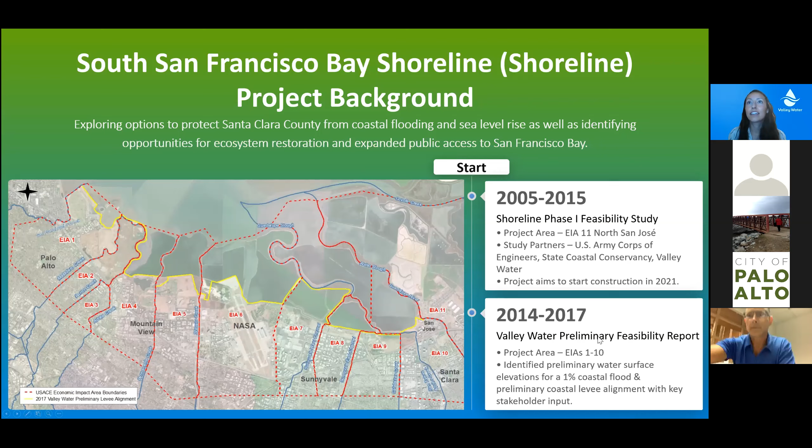So the next study I want to talk about is the Strategy to Advance Flood protection, Ecosystems, and Recreation along San Francisco Bay, also known as the SAFER Bay study. The public release of the draft SAFER Bay feasibility report for the Palo Alto area happened last year in June, and it was prepared by a consultant on behalf of the San Francisquito Creek Joint Powers Authority. The Joint Powers Authority is a regional government agency founded in 1999 by the cities of East Palo Alto, Menlo Park, and Palo Alto, as well as the San Mateo County Flood Control District and Valley Water.

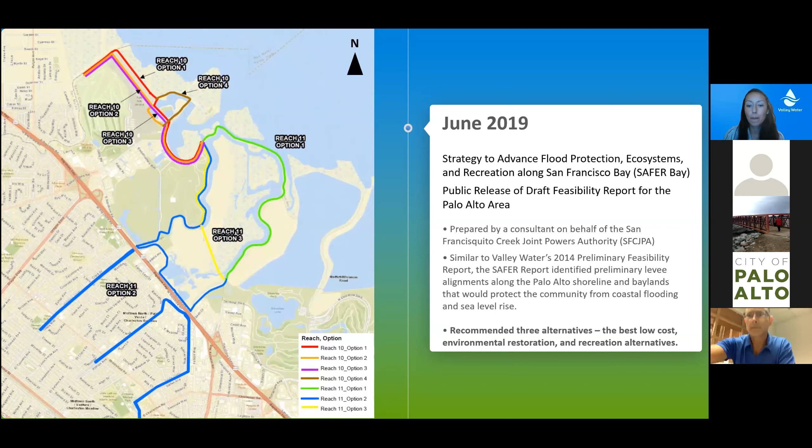And similar to Valley Water's preliminary feasibility study that I just mentioned, the purpose of the SAFER report was simply to identify viable levee alignments that would protect the community from sea level rise and coastal flooding. The Palo Alto SAFER Bay project is divided into 2 reaches designated as Reach 10 and Reach 11 as shown in the map here. And within each reach, there are multiple potential options to achieve the flood protection objective. The report recommends 3 levee alignment alternatives. One is the lowest cost, another maximizes environmental restoration, and the last maximizes opportunities for recreation. Which leads us to today.

The Shoreline Phase 2 feasibility study will build on all of the information gathered in these previous studies and will evaluate all of the SAFER alignments in more detail. The study area encompasses economic impact areas 1 through 4 along the shoreline from San Francisquito Creek and Palo Alto down to Mountain View Slough. And you can see on the map, the project area is outlined in yellow. I'll talk more about the study in further detail in the coming slides.

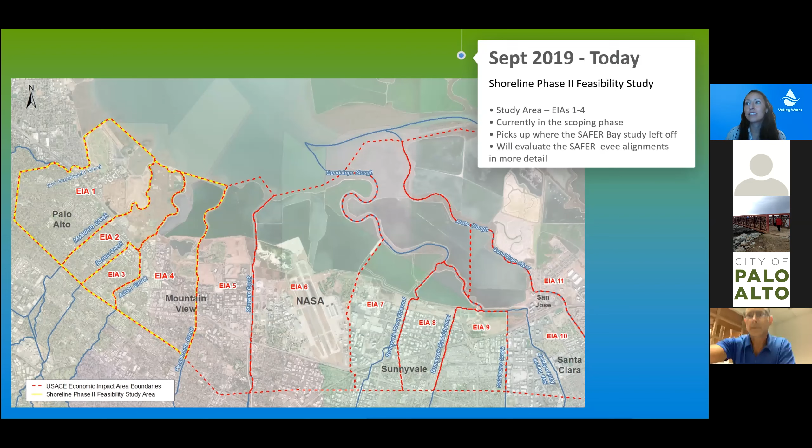So again, this is just to help orient ourselves. So the Phase 2 feasibility study project area runs along the Palo Alto shoreline north of Highway 101. There are a number of structures and key infrastructure located in this area, including the Palo Alto Airport and the Palo Alto Regional Water Quality Control Plant.

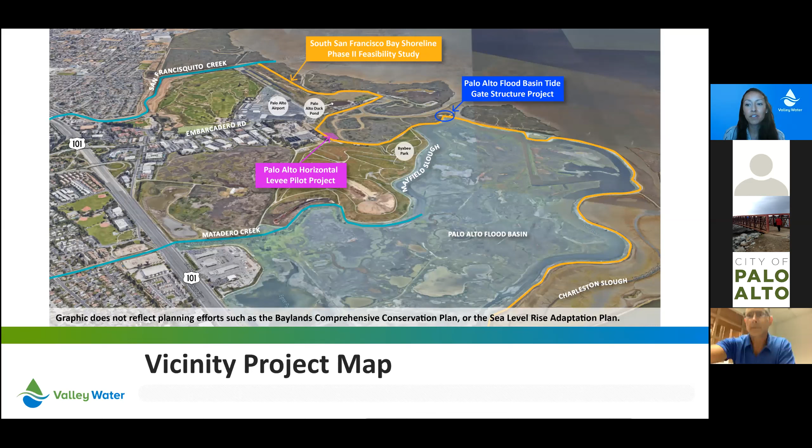Okay, so the U.S. Army Corps of Engineers is the federal lead agency of the Shoreline Phase 2 feasibility study. In general, U.S. Army Corps of Engineers feasibility studies are cost shared with the sponsor. So the study non-federal sponsors are Valley Water and the California State Coastal Conservancy. Study sponsors pay 50% of the cost of the study, while the U.S. Army Corps of Engineers pays for the other 50%.

Lastly, the City of Palo Alto is a vital local partner for the study. The city shares its knowledge and experience of the project area, local conditions, environment and habitat, and design and maintenance issues related to the project alternatives under consideration.

So the Shoreline Phase 2 feasibility study is a dual purpose project. The main purposes are to provide coastal storm risk management as well as opportunities for ecosystem restoration. So the specific coastal storm risk management study objectives are to reduce risk to human life, health, and safety caused by coastal flooding and sea level rise, reduce economic damage from coastal flooding to the community, and reduce flood risks in a manner that maintains or improves the ecological function of the baylands by implementing nature-based flood protection solutions.

The project-specific ecosystem restoration objectives are to restore ecological function and habitat for native plant and animal species, reduce risk to baylands from coastal flooding and sea level rise, and to the extent practicable, implement measures that increase public access to the shoreline. All of the proposed project alternatives for the Shoreline Phase 2 feasibility study should stay within the study constraints listed here. Specifically, the project should not affect critical infrastructure or increase flood risk. The project should avoid impacts to other restoration projects in the bay and avoid reducing recreational access opportunities.

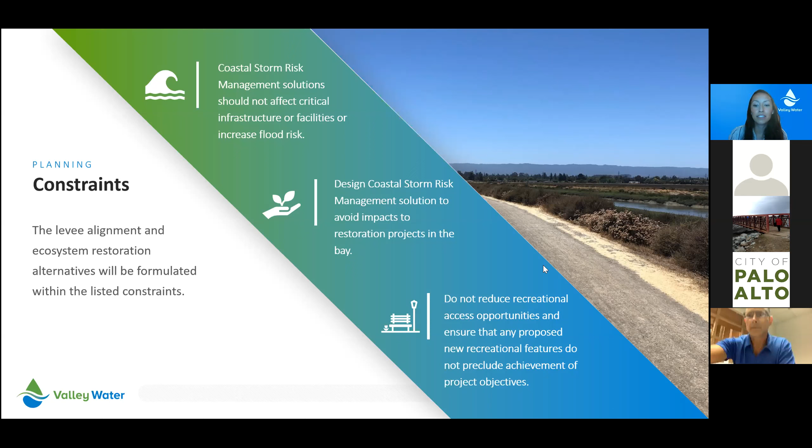So the next upcoming milestone is the tentatively selected plan milestone, scheduled for spring of 2021. At this milestone, the study partners will agree on one recommended project alternative to move forward with more detailed engineering and cost design. Between now and the tentatively selected plan milestone, the study partners will develop project alternatives, ecosystem restoration options, as well as a bunch of different levee alignments. Then they'll investigate the engineering feasibility, economic justification, and environmental acceptability of these levee alignments and ecosystem restoration alternatives.

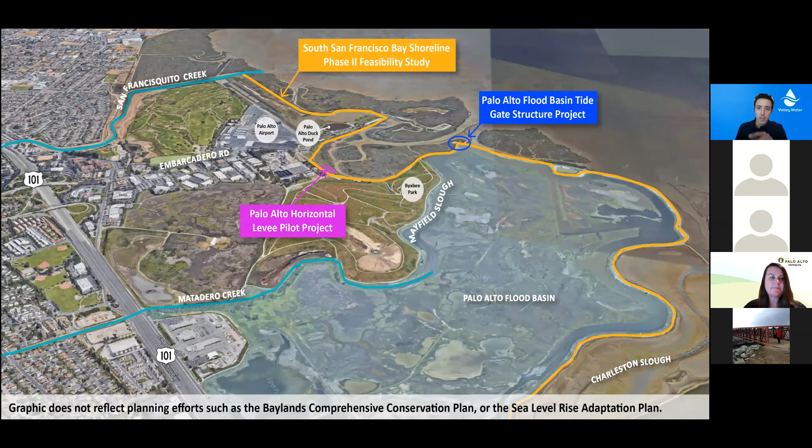As you can see on the screen right now, that is the existing tide gate structure. It's out there on the Adobe Creek Loop Trail. I'm not clicking through here. Okay, just to put it in perspective, along in the orange there, you can see one of the proposed alternative alignments for the Shoreline Phase 2 study that Roxanne just talked about. As well as in blue, there's a little blue circle there that shows where the existing tide gate structure is.

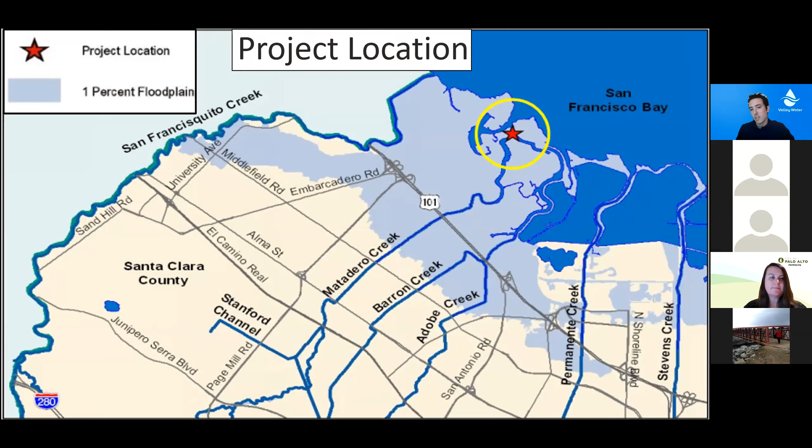Moving on, here's a little overview map. You can see the red star up in the upper part of the map, that's where the existing tide gate structure is. And that light blue that you see inland, that's the FEMA flood zone, because of coastal flooding risks, because the existing levees are not FEMA certified. They were built back in the 50s, and they're not recognized by FEMA, but they do provide flood protection.

And also just to note, the levees along the top are a lot higher than the levees along the inside. And that's because those are also the outer portions of the levee of the Palo Alto flood basin, and the tide gate structure are preventing against coastal flooding from a high tide.

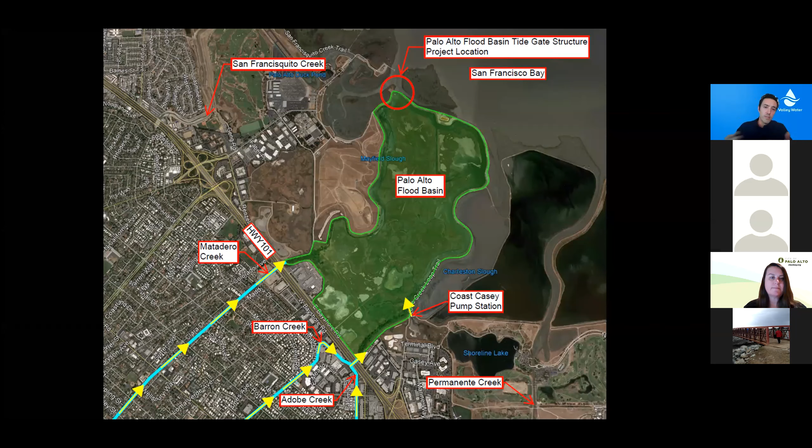And so that's what the levees and the tide gate structure is doing. It's keeping that high water level out and allowing for a low water surface elevation so that there's that capacity for the big storm events.

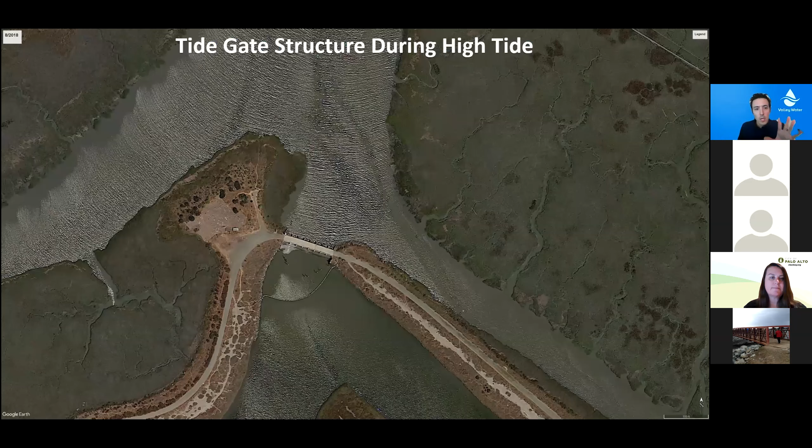Here's an aerial shot just showing you the existing tide gate structure during a high tide. And that same shot during a low tide, and the water level in the basin is the same. This is all taken during the summer, but you can see there's quite a big difference in the sea level in the high tide and low tide.

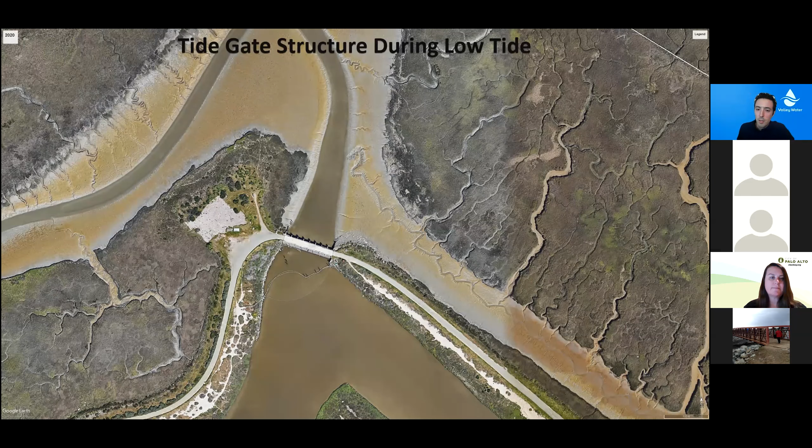Just a quick background, the existing structure was constructed back in 1957 by the City of Palo Alto, the Santa Clara County Flood Control and Water Conservation District, which is now Valley Water, and Santa Clara County. And as we talked about, the Palo Alto Flood Basin controls the starting surface water level elevations for Adobe, Barron, and Matadero Creeks. And the tide gate structure, combined with the levees, provide also coastal flood protection.

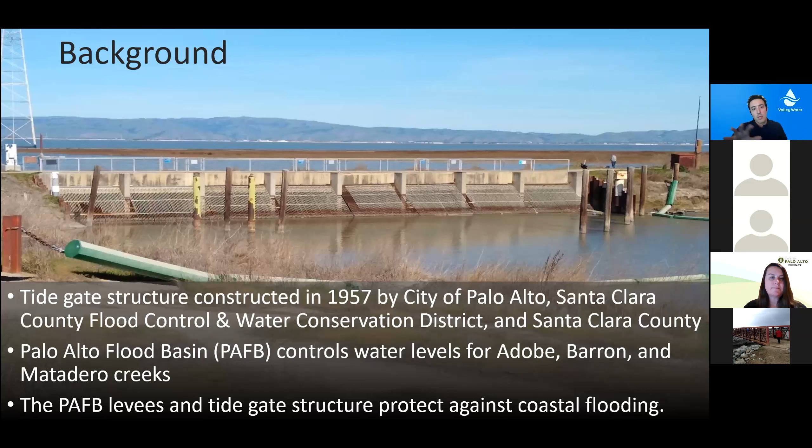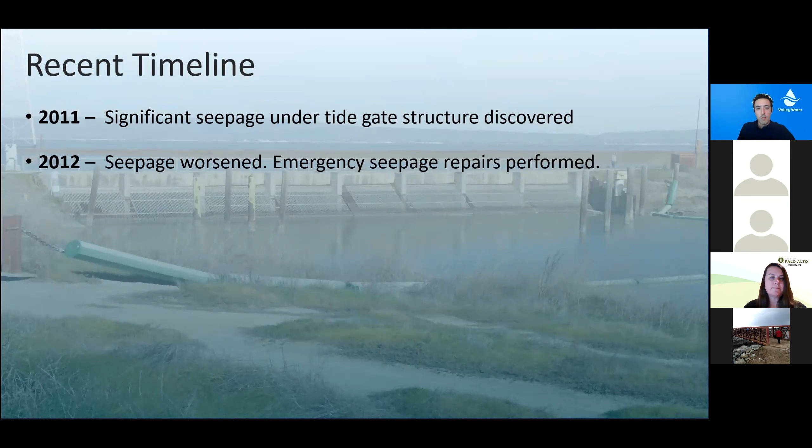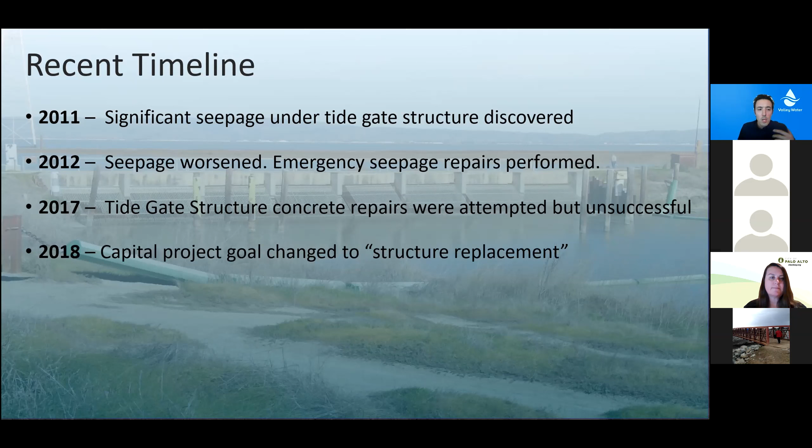So a more recent timeline, back in 2011, significant seepage was discovered underneath the structure. And in 2012, that seepage worsened, and Valley Water performed emergency repairs to stop that seepage. And then in 2017, Valley Water attempted to perform concrete repairs to lengthen the service life of the existing structure, but the contractor wasn't able to actually complete that construction because of additional damage found, and they were unable to dewater the work site. And so upon further review of the structure, it was actually determined that it's going to be better to replace the structure rather than repair it.

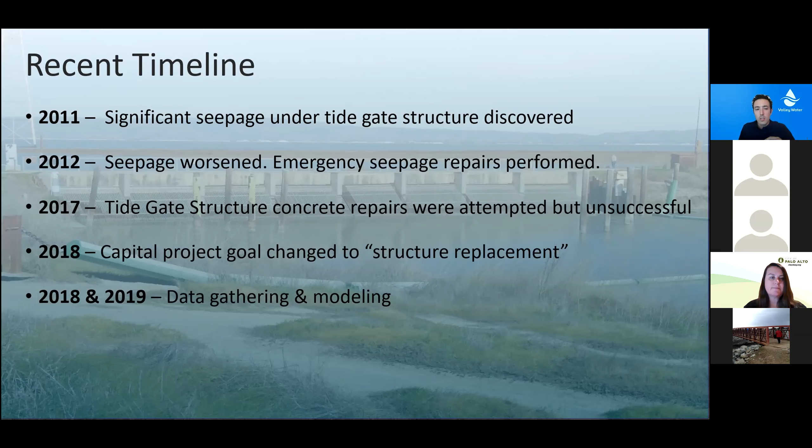So in 2018, the goal changed to a replacement structure. And we've been doing a lot of data gathering, modeling to support this replacement structure. And currently we're ongoing with preliminary design.

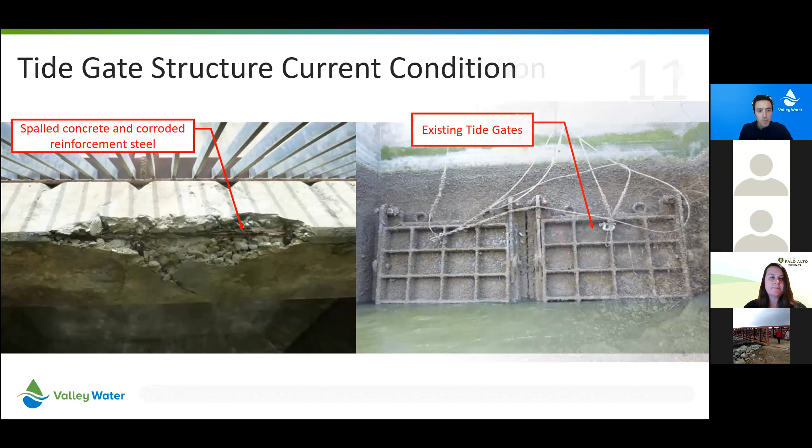Here's some pictures just kind of showing what the existing structure looks like if you were to get underneath and look at it. There's a lot of spalled concrete and exposed rebar and weathered tide gates. And even on the top, you can see spalled concrete and exposed rebar. You know, it's in a marine environment, and this is kind of typical of the age of this structure, and it's time to be replaced.

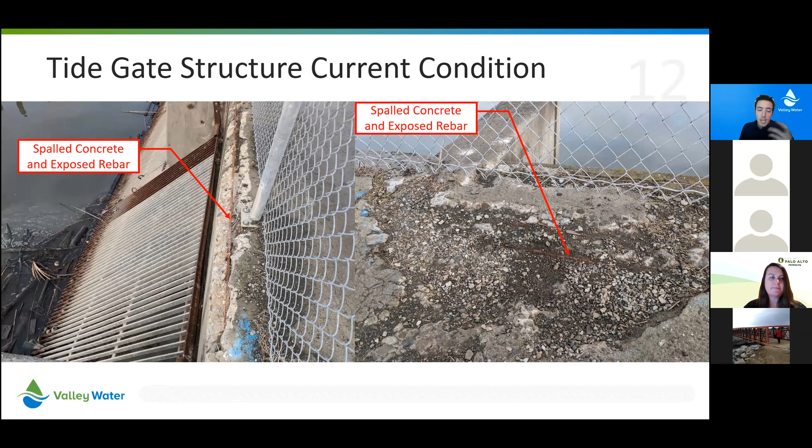So the existing structure is a 63-year-old structure. It's got some structural and hydraulic deficiencies, and maintenance is becoming more and more problematic and costly. It has some seismic vulnerabilities. You know, it's founded on timber piles. There's some potentially liquefiable soils. There's leaky tide gates. As you saw, there's spalled concrete and corroded steel reinforcement.

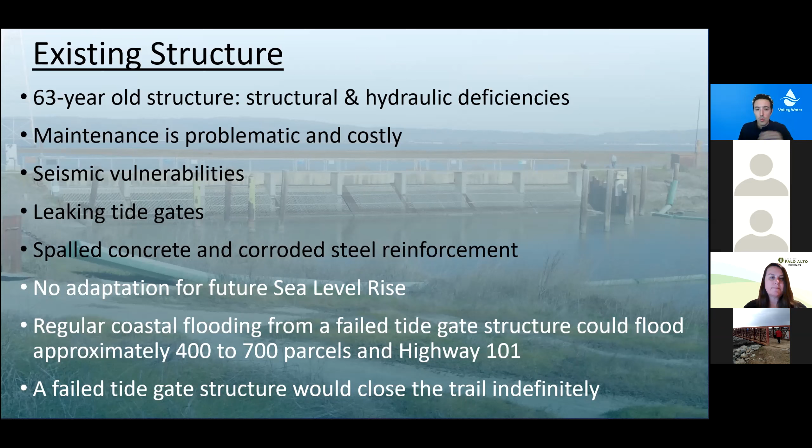There's no adaptation for future sea level rise, and regular coastal flooding from high tide could potentially flood 400 to 700 parcels and Highway 101, and we don't want to let that happen, and that's why we're replacing the structure. And also want to note that a failed tide gate structure would close the trail down indefinitely.

So with the proposed replacement tide gate structure, we'd see continued coastal and creek flood protection, continued protection of the existing basin habitat. Construction's anticipated to take about 4 years, and that construction's only occurring over a 5-month window each year between September 1st and January 31st, and that's to protect the California Ridgway's rail breeding season. It would accommodate roughly 2 feet of future sea level rise, and a temporary trail closure is estimated about 35 months.

And also want to note that the new tide gate structure is going to be about 5 feet higher than the existing structure. And the new tide gates and sluice gate will be more efficient than the existing gates. It'll have improved operations and maintenance, and fewer maintenance required. And the current preliminary cost estimate is around $33 million or more.

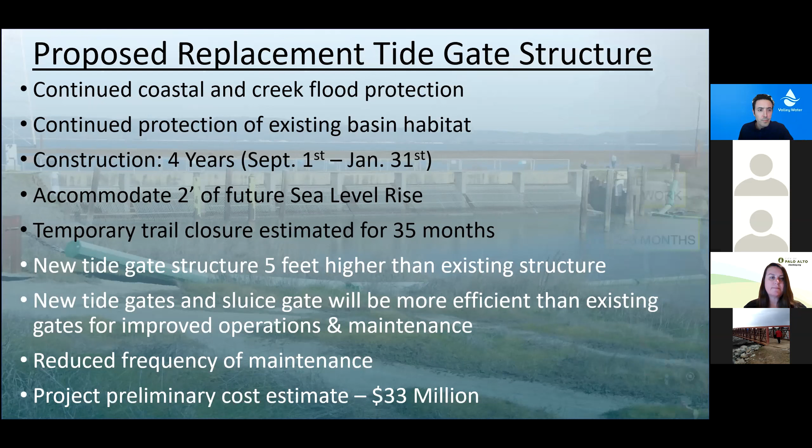These next slides, I'm going to go through a little quick. It just shows the construction staging proposed. And the big takeaway from this is just showing the difficulties in constructing this project. You know, we're out here, we've got a sensitive habitat. You've got the Palo Alto flood basin on one side, you've got the San Francisco Bay on the other. We're out here in the water. Everything has to be dewatered to construct. And most importantly, we're constructing only in a 5-month window where there's also a rainy season involved in there.

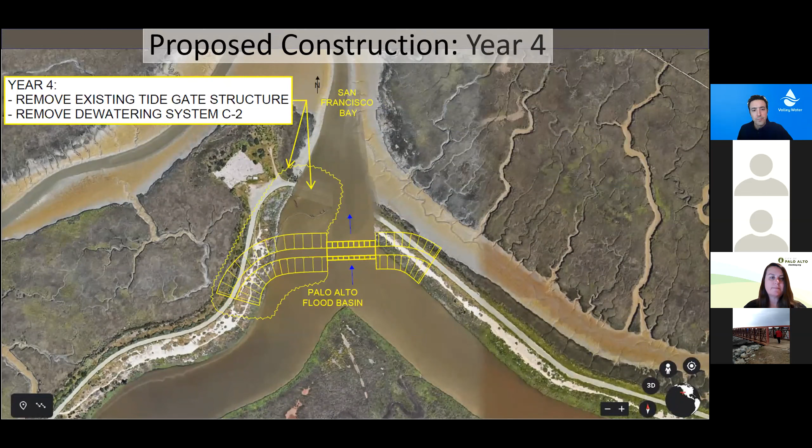And also the big takeaway here is that we have to construct the new structure first. And then once a new structure is put into service, the existing structure is removed. And so there's going to be continued flood protection throughout construction. So here in yellow, you can kind of see this is where the new structure is planned.

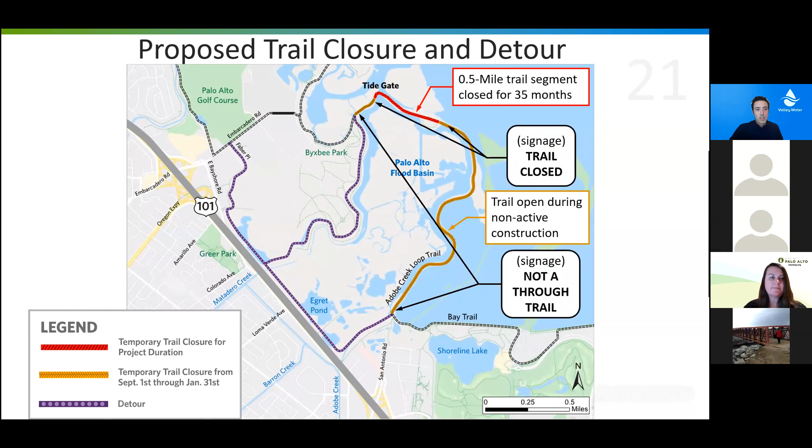So environmental resources, as you just saw, we're in a very unique setting along the bay. We have sensitive fish and wildlife species. There's 4 pictured on the screen: the salt marsh harvest mouse, longfin smelt, burrowing owl, California Ridgway's rail, and there's many more. The salt marsh habitat, bay habitat, Palo Alto flood basin habitat, the Adobe Creek Loop Trail, which is part of the San Francisco Bay Trail. So we got recreation, Byxbee Park, Palo Alto Baylands access.

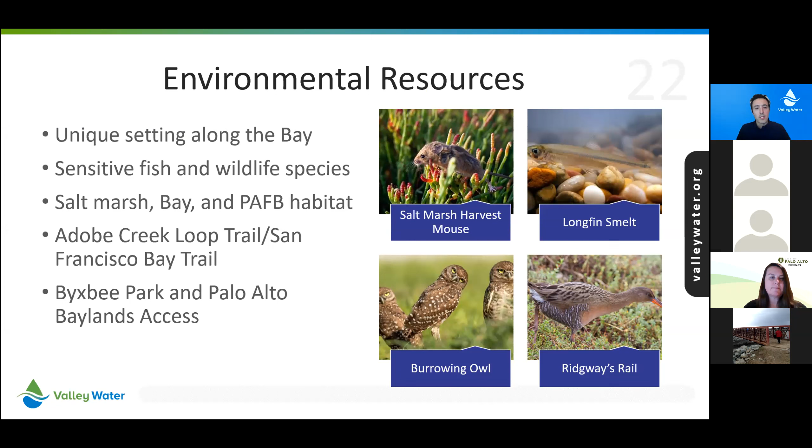Many considerations going into the development of this project and part of the permitting and our partnerships with all of our stakeholders. First of all, we have every permit under the sun that we're dealing with. But our CEQA is planned to be a mitigated negative declaration, also known as a CEQA MND. And it's actually probably going to be posted this coming Monday. And so I'll get to where you can sign up to make sure you're notified of where to view that and how to view that.

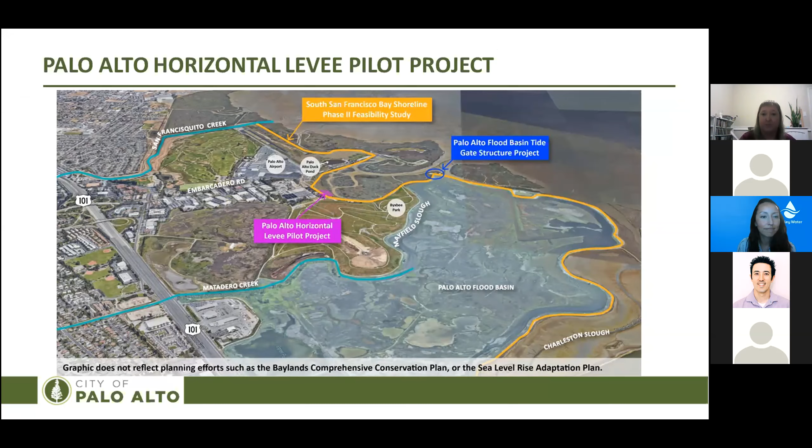So some of the project drivers have already been covered by Valley Water staff in their earlier presentation, so I'll keep this pretty high level. But the key project drivers really include the current state of the flood control levees surrounding the city of Palo Alto. Right now, they are not engineered to meet FEMA accreditation standards, and we do experience overtopping of those levees, especially during times that king tide events occur at the same time as storm events.

That's led us to participate in a few flood control levee improvement projects, those namely being Safer Bay and the South San Francisco Bay Shoreline project that we heard previously in the webinar. Those projects enable the city of Palo Alto to now think a little bit outside of the box and see if there's any ways that we can include green infrastructure into those larger flood control levee improvement projects. And that's where this project fits in.

Another project driver includes the acknowledgement from many resource agencies statewide that transition zones between terrestrial and tidal habitats are severely constrained and developed, and constrained specifically by steep artificial faces of traditional levees. And this is Bay-wide, so it's not a Palo Alto specific concern, it's definitely Bay-wide and also statewide. So the acknowledgement by resource agencies that the transition zones between terrestrial and tidal habitats are constrained and in need of additional restoration has made them a priority for many of those resource agencies.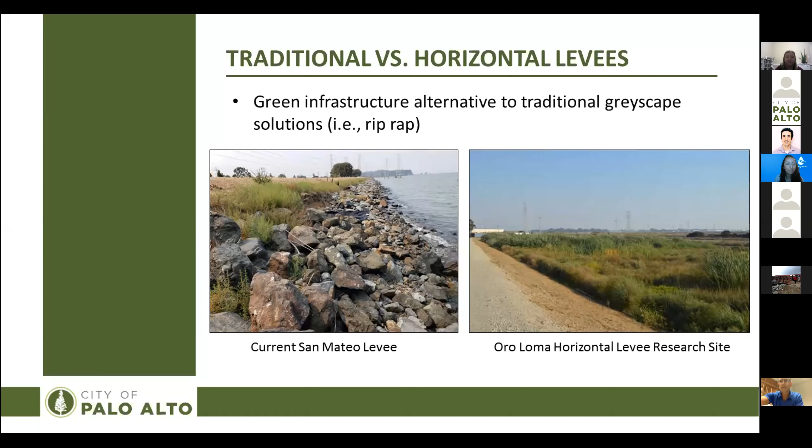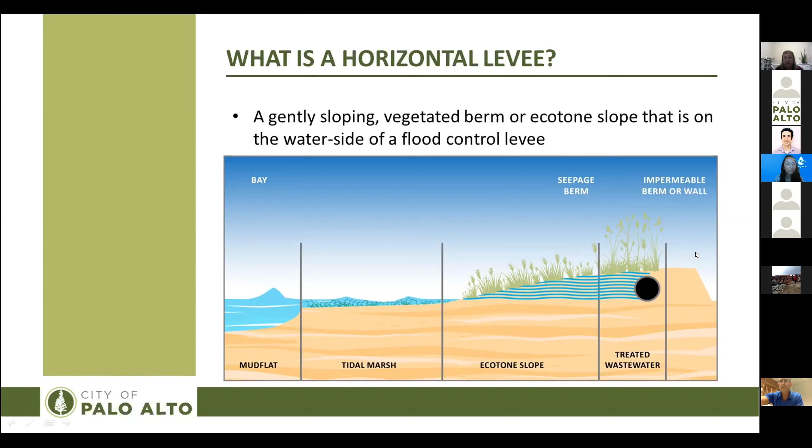So what is a horizontal levee? A horizontal levee is a gently sloping vegetated berm or ecotone slope that is on the water side of a flood control levee. So as you can see in this figure here, the flood control levee would be all the way on the right-hand side of the figure. And then the horizontal levee would be between that and the tidal marsh and mudflat and then the Bay. So a horizontal levee is essentially a brackish transition between an upland terrestrial habitat and a tidal mudflat bay habitat.

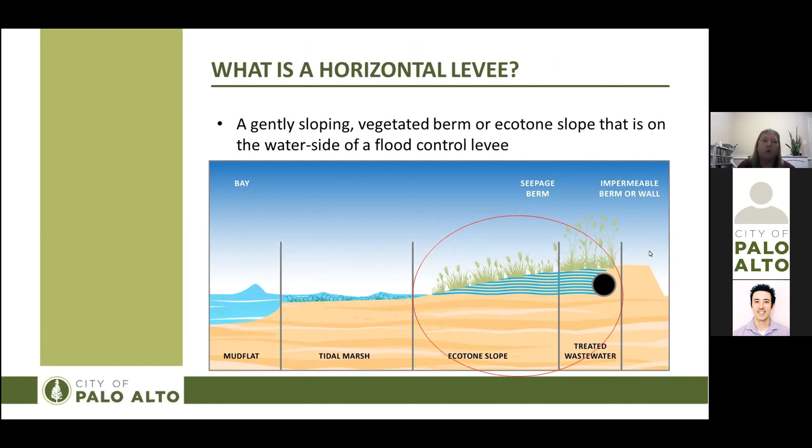So horizontal levees include numerous benefits above and beyond just the wave attenuation that riprap provides. That includes habitat enhancement, sea level rise adaptation, and wastewater polishing treatment. So for habitat enhancement, horizontal levees can provide that transitional habitat between terrestrial and tidal marsh that I mentioned previously in the webinar. That's a restoration priority for numerous resource agencies.

That habitat also provides high tide refugia for endangered species such as the salt marsh harvest mouse. And it also helps to recreate that historic freshwater seep that is missing in our system now. Those historic freshwater seeps have mostly been channelized into flood control channels or creeks to protect us further from flood issues.

For sea level rise adaptation, horizontal levees provide that wave attenuation similar to riprap. In addition to that, horizontal levee systems will accrete and accumulate sediment over time such that the ground level elevations will increase over time. And because of that, it can enable marshes to migrate upland in the case of rising seas. If a horizontal levee system is not installed, we run the risk of tidal marshes being overtaken by the seas and becoming open water as the seas begin to rise.

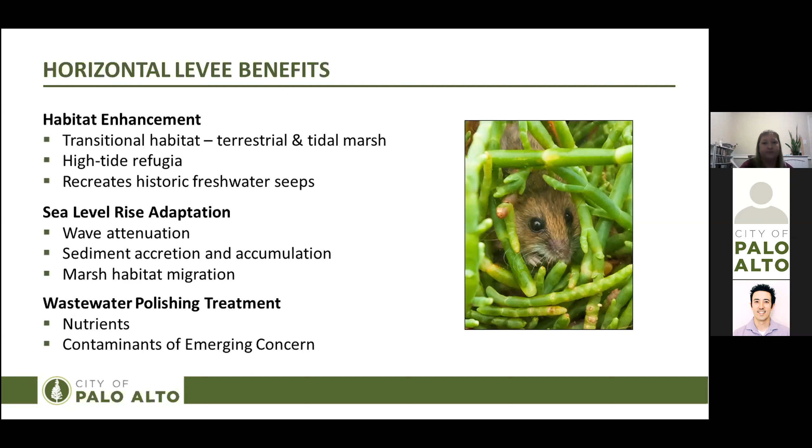So the horizontal levee would provide an additional level of treatment. It's bonus treatment to that treated wastewater. And namely, it's looking at removing additional nutrients and contaminants of emerging concern. All right, so with all of those great benefits in mind, the key goals of the Palo Alto Horizontal Levee Pilot Project are pretty specific.

So we want to collect information on permitting and implementation of a small-scale horizontal levee within the Palo Alto Baylands. And specifically, we want to make sure that we are extending the knowledge that we've learned from the Oro Loma Horizontal Levee Research Site to include now tidal action. So the Oro Loma Horizontal Levee Research Site is a great project and it's a great horizontal levee, but it is a research site. So it's actually a closed loop. There is no connection to the horizontal levee in Oro Loma with tidal action.

And so this project, the Palo Alto Horizontal Levee Pilot Project, would then provide key information on tidal interactions between the system and the tides. And so we're looking to get information on plant palette and irrigation regimes and all of that great design specifications that are needed to take these systems full scale and also regionally if other people are looking to apply this system.

With that in mind, we're hoping to take all that great information and integrate it into design elements for the larger flood control levee improvement projects specifically for Palo Alto. So those are the Safer Bay project and the South San Francisco Bay Shoreline study that we heard about previously by Valley Water staff.

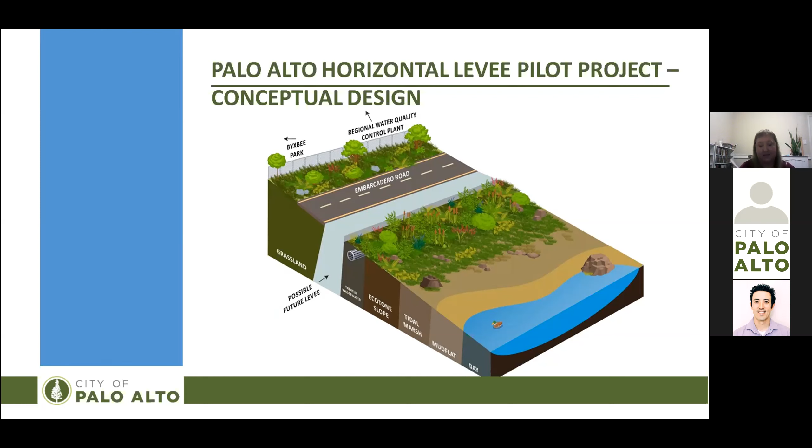So what have we done so far? We have completed a conceptual design report back in 2018. And that report has told us that horizontal levees are technically feasible and they are appropriate for the Palo Alto Baylands. We also then moved forward with a preliminary design report that gave us about a 30% project definition for the yellow location shown on the figure there.

As we were going through the preliminary design report for that location, we were collecting all this great data and all this great information, and we discovered a fatal flaw for that proposed location. And that is that it's really just too close to the airport for us to believe that we're actually going to get approval through the FAA system. And so if you'll notice in the figure, that yellow location is right next to the Palo Alto Airport. It's actually on their property.

But more importantly, it's in the approach to the runway. So a lot of planes are going over that area. And so it's really just not going to work for this point in time. So we spent early 2020 reevaluating a location for the pilot, and we decided to move it to the red location shown in the figure. And we are currently working to revise the preliminary design report with this new location.

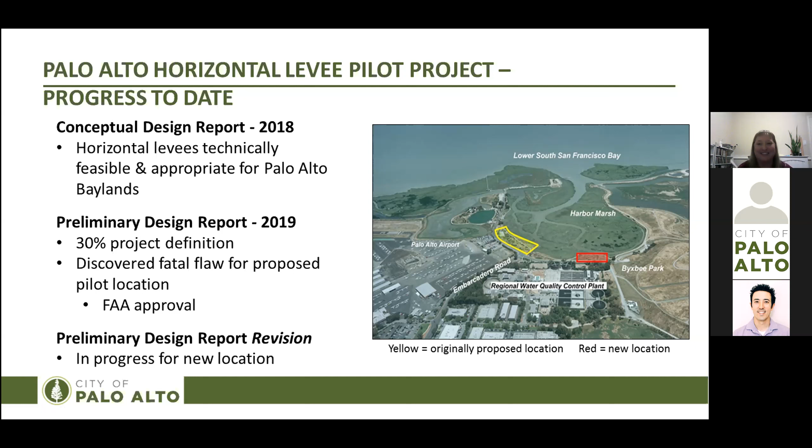And so the preliminary design report is the place where we start to really dig into the details and try and see if there's any fatal flaw before we move full bore into a full design of the project. So we're really starting to dot our I's and cross our T's. So for next steps, we are looking forward to continuing our collaboration with the San Francisco Estuary Partnership. We're hoping to revise the preliminary design report and finish it before the end of this year.

We really want to brainstorm if there's any way that we haven't thought of to really engage our local communities and the youth on this project, and perhaps use this project for further discussions on sea level rise and green infrastructure. And then if everything lines up, we're looking at starting the permitting and the final design in 2022. And again, if everything is on schedule and there's no major hiccups, we would be looking at starting construction around 2023.

So before I end, I just want to give a quick thank you to our 2 grant funders, the EPA and the Coastal Conservancy. And then I do want to acknowledge that this is definitely a group effort. The project team is made up of the San Francisco Estuary Partnership, ESA, as well as the City of Palo Alto.

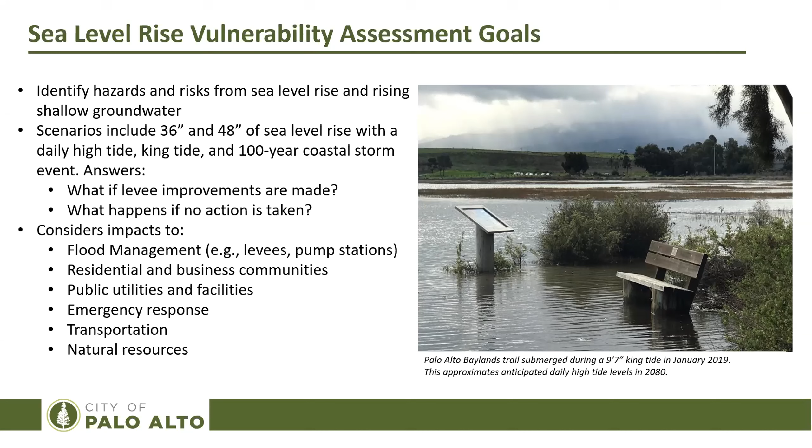So as a reminder, the sea level rise adaptation plan that we're developing will be a chapter in our city's sustainability and climate action plan, and that is a council priority. One of the main goals that we have for all of this is to make sure that we as city staff are all singing off the same sheet of music, and we have clear technical assumptions and tools that we're using across city departments that we can implement so that we are all doing our respective jobs to make sure sea level rise stays on our radar, and we are doing what we can to plan and respond to that.

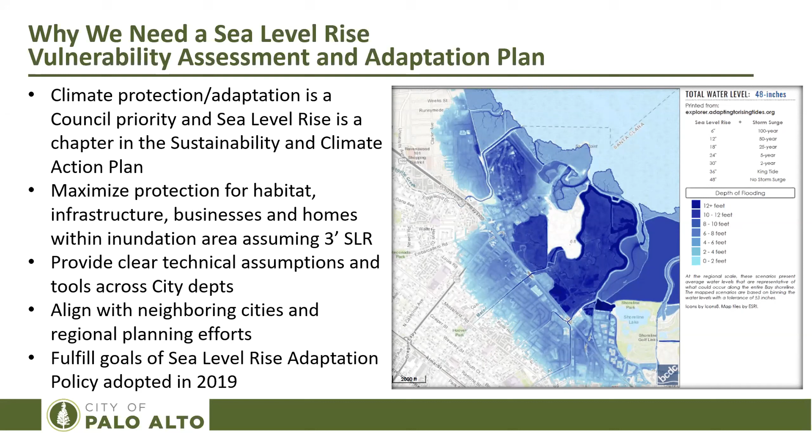We also want to make sure that we are partnering properly with our neighbors on either side of our border and also our regional planning efforts so that we are in sync with each other and not hindering each other's efforts. The graphic that you see in the slide shows sea level rise, what that footprint might look like at 48 inches of water, which could be comparable to 36 inches of sea level rise in a king tide.

So a lot of people want to know, well, what would actually be in a sea level rise adaptation plan? Well, it would for sure include a menu of adaptation strategies, a number of things that we could do to solve problems, and we're going to probably have more than one solution to a number of the problems that we develop solutions for. So we need to have evaluation criteria to look at the benefits and the trade-offs and look at that through a sustainability lens. What happens if we pick options in terms of social and environmental impacts, and of course costs as well.

The other thing that we need to bring into our vocabulary is this idea of adaptation pathways. It's not just about a one-time fix, but we need to design our fixes so that they can be adaptable over time as sea level rise continues to increase. Part of thinking about adaptation pathways is to know, well, what conditions trigger action so that we have our solutions in place in time for when the scenario that we're trying to address actually arrives. So, some of these projects can take years to get in place with design and review and funding, let alone construction. So we need to know what those triggers are so we start work in time.

Our sea level rise adaptation plan will be updated every 5 years to align with Ocean Protection Council guidance. The Ocean Protection Council is a state entity that does the research and sets pretty much the expectations that cities and counties use all across California, so that we're all using the same assumptions for sea level rise in the decades ahead.